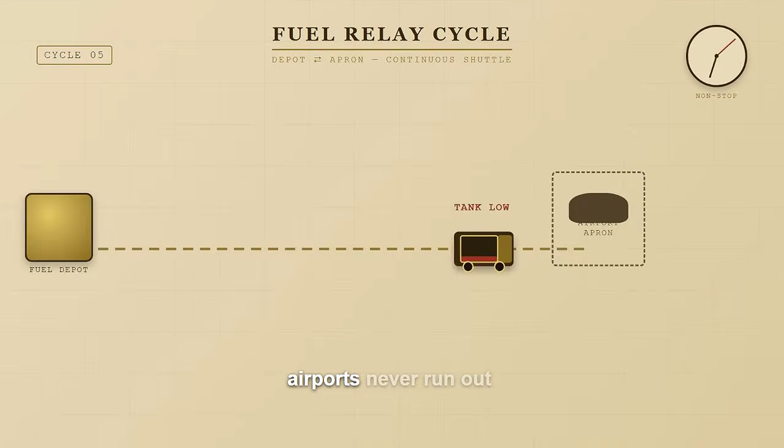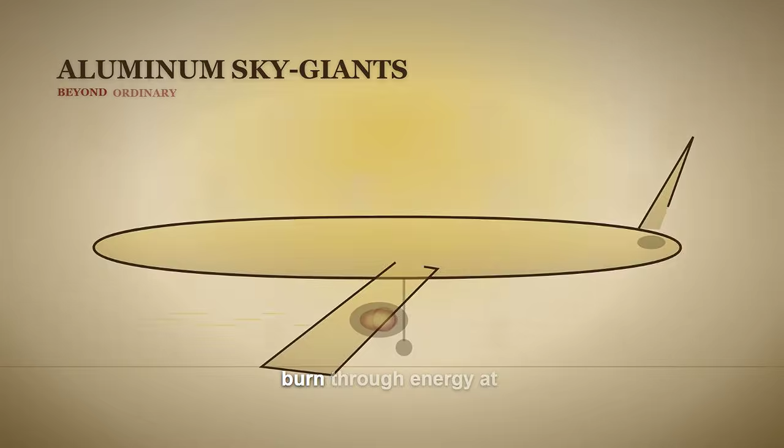To understand the sheer gravity of this problem, you have to realize that an airport is nothing like a local gas station. When you pull your car up to a pump, you are buying maybe 12 to 15 gallons of gasoline, which will easily last you a week or two. A major airport, however, isn't fueling commuter cars. It is supplying massive aluminum sky giants that burn through energy at a rate that defies ordinary human intuition. A single commercial aircraft can consume more fuel during its initial takeoff roll than a typical driver uses in an entire year of daily commuting.

When you multiply that individual consumption by the hundreds or even thousands of daily flights that pass through a global megahub, the numbers quickly spiral into a realm that feels entirely impossible to manage. Yet, the fuel never stops flowing. The planes never pull up to a gate only to be told that the pumps have run dry. Passengers sit comfortably in the terminal, sipping coffees and checking boarding passes, completely oblivious to the massive, invisible infrastructure operating directly beneath their feet to ensure the global transportation network never grinds to a halt.

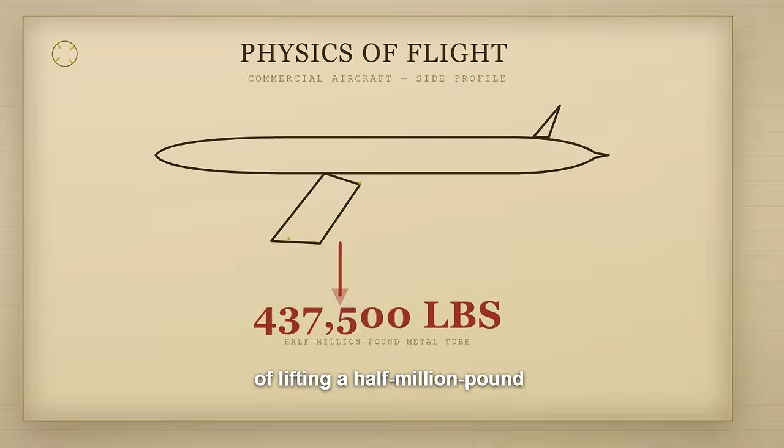To fully grasp the scale of the aviation industry's thirst, we have to look directly at the math behind modern jet engines. For decades, aerospace engineering has focused heavily on making commercial aircraft as fuel-efficient as possible. But the physics of lifting a half-million-pound metal tube into the upper atmosphere require a monumental amount of raw power. Consider the varying appetites of commercial aircraft. A standard short-haul workhorse like the Boeing 737-800 carries a maximum fuel capacity of just under 7,000 gallons, burning through roughly 850 gallons every single hour it is in the air.

Step up to a mid-sized, long-haul wide-body like the Boeing 787-9 and the capacity surges to over 33,000 gallons, with an average hourly burn rate of 1,600 gallons. The larger Boeing 777-300ER pushes those boundaries even further, holding nearly 48,000 gallons of jet fuel and guzzling an incredible 2,500 gallons per hour. When you reach the absolute peak of commercial aviation architecture, the double-decker Airbus A380, the numbers become entirely surreal. The A380 can hold up to 84,500 gallons of jet fuel within its massive wings and fuselage tanks. That is enough liquid to fill a large backyard swimming pool multiple times over, loaded into a single airplane for a single journey.

When you scale this up to the level of a primary international hub, the daily demand becomes astronomical. Airports like Hartsfield-Jackson Atlanta International, London Heathrow, or Dubai International require between 3 million and 5 million gallons of jet fuel every single day just to keep their scheduled flights moving. If you were to rely entirely on traditional tanker trucks to deliver that volume of fuel from external refineries, you would need a continuous convoy of hundreds of trucks arriving at the airport gate every single hour of the day. It would create a logistical bottleneck of catastrophic proportions, paralyzing local highway systems and overwhelming airport security checkpoints. Because running out of fuel is never an option. If a major hub experiences even a brief interruption in its fuel supply, the global aviation network begins to unravel almost immediately.

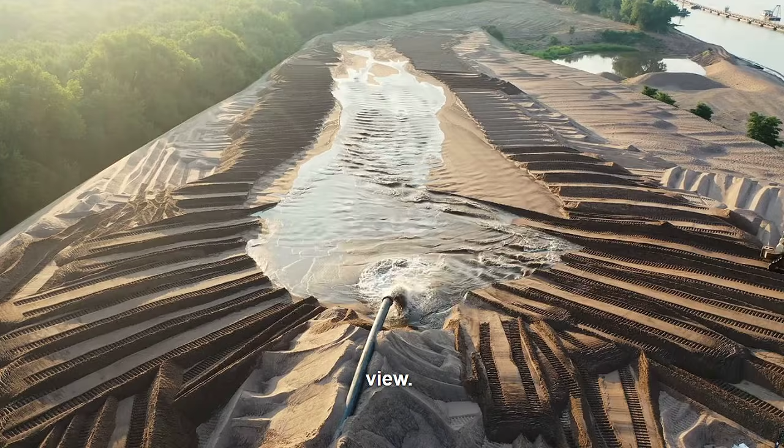This unbreakable supply chain begins far away from the active runways, rooted in a vast, secret network of underground pipelines. Most people assume that jet fuel is manufactured nearby or delivered purely via surface transport, but in reality, major airports are directly connected to the regional and national pipeline infrastructure of their respective countries. These pipelines stretch across hundreds of miles, silently moving millions of gallons of refined petroleum products from distant coastal refineries directly toward the perimeter of the airfield.

It is a system that functions remarkably similarly to a municipal water network. The fuel is constantly under pressure, always moving and always flowing toward the airport's primary intake valves, completely independent of traffic congestion, weather anomalies, or surface disruptions. The engineering behind these pipeline systems is a marvel of modern fluid dynamics.

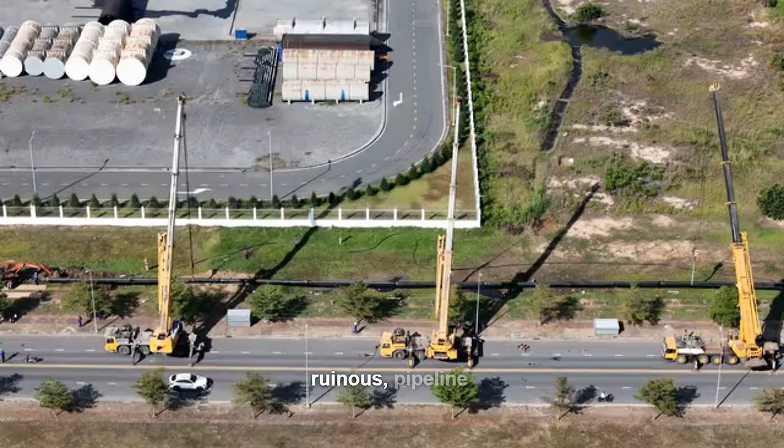Because building separate pipelines for every single type of petroleum product would be financially ruinous, pipeline operators use a technique known as batching. A single underground pipeline might transport automotive gasoline for 12 hours, followed immediately by ultra-low sulfur diesel, and then followed by a massive batch of Jet A or Jet A1 fuel. These distinct liquids travel through the same pipe back-to-back, moving at precise speeds to minimize mixing at the interfaces.

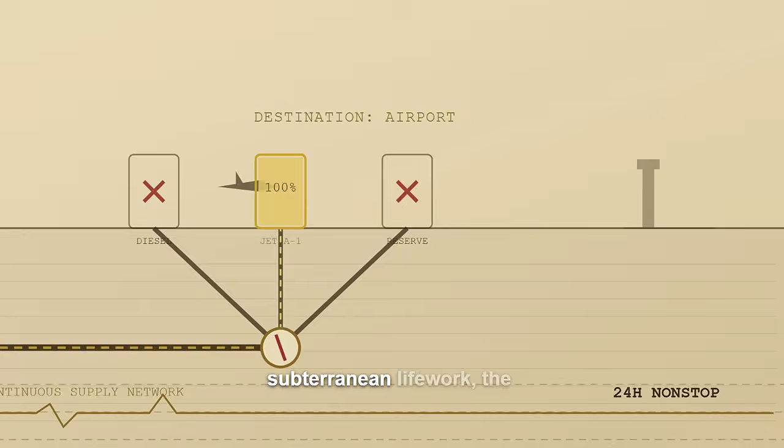High-tech monitoring stations use density sensors and laser spectrometry to detect exactly where one product ends and another begins, allowing operators to divert the incoming jet fuel into the correct storage facilities once it finally reaches its destination. Without this continuous subterranean lifeline, the modern aviation industry quite simply could not exist.

Once the pipeline delivers the fuel to the airport property, the liquid transitions into the first major line of defense against supply disruption, the fuel farm. Located usually on the far periphery of the airport boundary, well away from the passenger terminals, the fuel farm is a heavily fortified industrial compound dominated by clusters of colossal, white storage tanks.

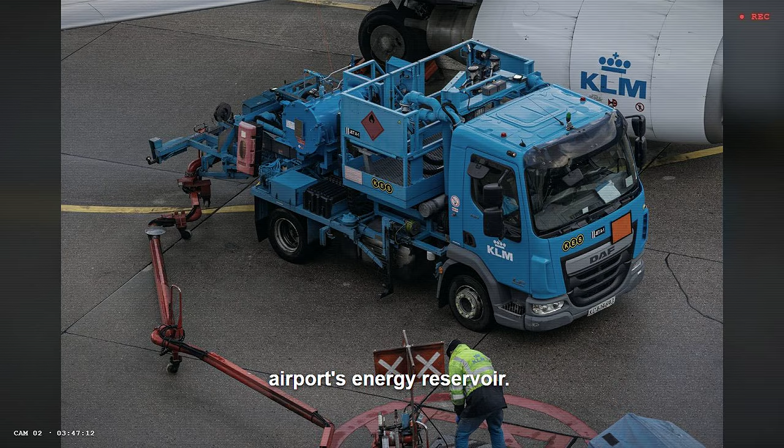These structures are easily recognizable from the air, but few passengers appreciate the critical role they play as the airport's energy reservoir. A standard airport fuel farm consists of multiple tanks, each capable of holding several million gallons of fuel. Combined, they are designed to maintain a strategic buffer, typically a 3 to 5 day supply of fuel, to insulate the airport against unexpected disruptions upstream, such as a temporary refinery shutdown or a pipeline maintenance event.

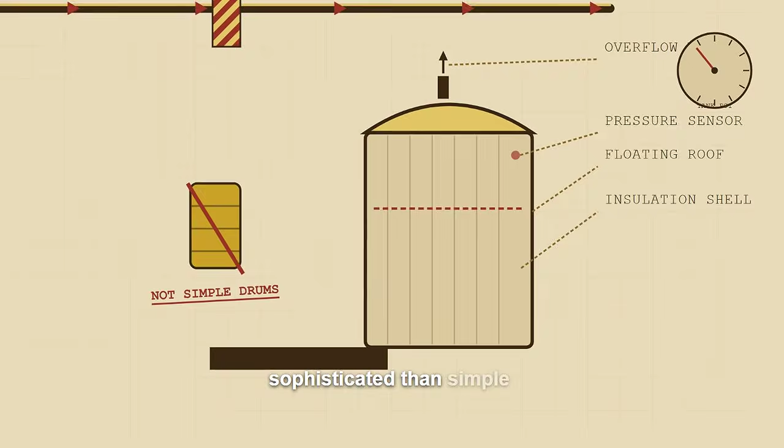These massive storage units are far more sophisticated than simple metal drums. Most modern aviation fuel tanks utilize a design known as a floating roof. Instead of having a fixed ceiling with an empty pocket of air above the liquid, the roof literally floats directly on top of the fuel surface, rising and falling as the tank is filled or drained.

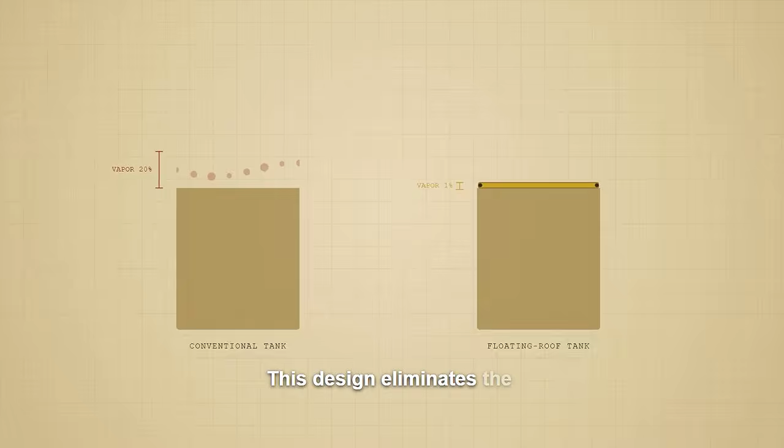This design eliminates the presence of vapor space inside the tank, drastically reducing the risk of explosive vapor buildup and preventing evaporation loss. Furthermore, the interior surfaces are coated with specialized epoxy liners to prevent metallic corrosion, ensuring that the fuel remains pristine during its period of rest.

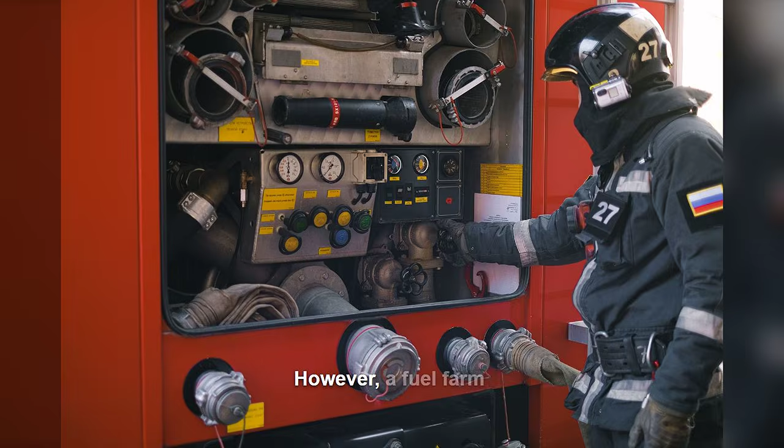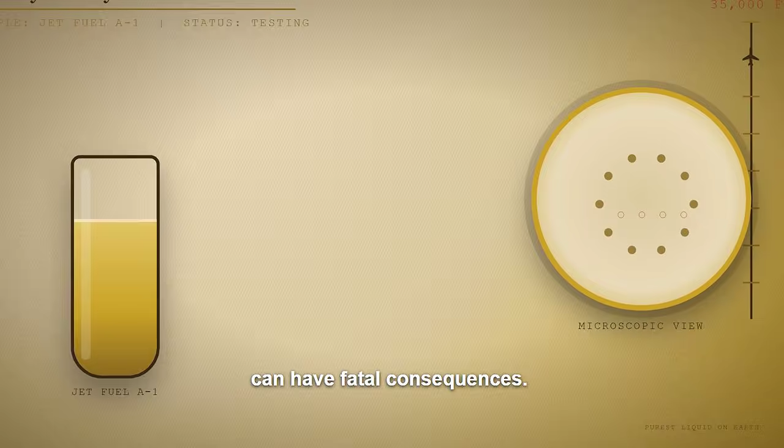However, a fuel farm is not merely a passive storage facility. It is a highly active quality control laboratory. Jet fuel is subjected to some of the strictest purity standards of any liquid on Earth because at 35,000 feet, small impurities can have fatal consequences. The primary enemy of jet fuel is water.

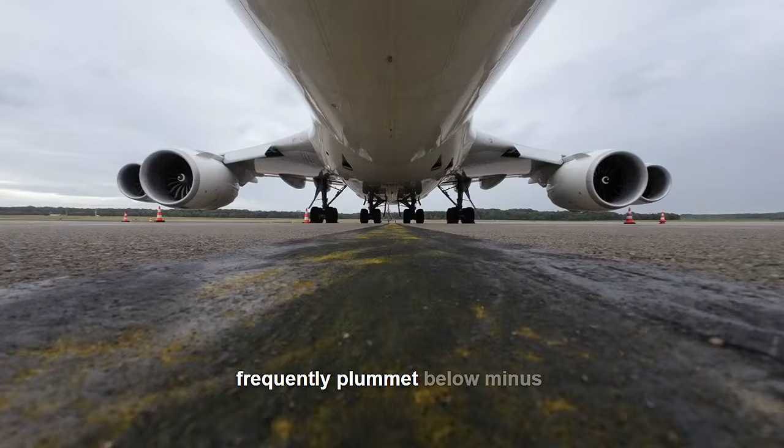If water manages to find its way into an aircraft's fuel tanks, it settles to the bottom because it is denser than the fuel. When the aircraft climbs into the extreme cold of the upper atmosphere, where ambient temperatures frequently plummet below -50 degrees Celsius, that suspended water can instantly freeze into ice crystals. These ice crystals can clog delicate fuel filters, starving the engines of fuel and causing a catastrophic dual-engine flameout.

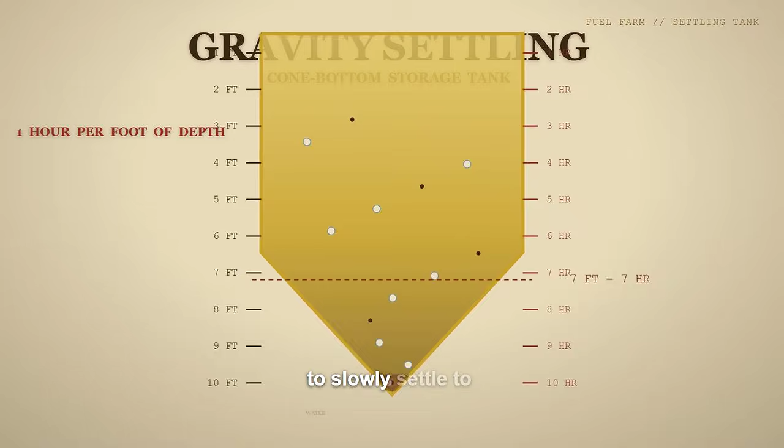To prevent this, the fuel farm enforces a strict operational protocol known as settling time. Whenever a tank receives a new batch of fuel from the pipeline, it is immediately locked down and isolated. The fuel must sit entirely undisturbed for a specific period, typically 1 hour for every foot of liquid depth in the tank. This allows any microscopic water droplets or fine particulate matter to slowly settle to the absolute bottom of the cone-shaped tank floor, where it can be mechanically drained off through specialized sump valves.

Only after passing a battery of rigorous chemical tests, including the clear and bright visual inspection and chemical water detection kits, is the fuel finally cleared to move forward into the distribution system.

Once the fuel is certified pure, it must be transported from the perimeter fuel farm to the actual wings of the aircraft parked at the gates. At smaller regional airports, this task is still handled by traditional fuel bowsers, specialized tanker trucks that drive back and forth across the tarmac. But at a massive mega hub, relying on trucks to move millions of gallons of fuel across active taxiways would be a logistical disaster and an unacceptable safety hazard.

Instead, these airports utilize a brilliant piece of infrastructure known as an underground hydrant system. Beneath the thick concrete slabs of the airport apron lies a vast, high-pressure network of steel piping that connects the central fuel farm directly to every single parking gate at the terminal. This system is kept constantly pressurized by massive, computer-controlled pumps at the fuel farm, which adjust their output dynamically based on how many aircraft are drawing fuel simultaneously across the airport complex.

The operational flow of this underground network is a masterpiece of hidden engineering. It begins at the central fuel farm, where high-pressure pumps force the certified jet fuel into the primary subterranean mains. These pipelines branch out beneath the terminal apron substructure, terminating directly at individual gate positions. When an airplane pulls up to the gate, a passenger looking out the window might notice a small, inconspicuous metal hatch embedded directly into the concrete beneath the aircraft's wing. This hatch houses a high-pressure hydrant pit valve.

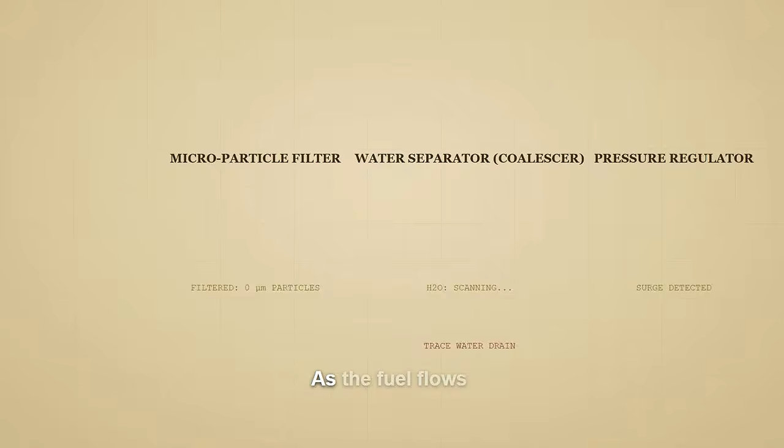To fill the airplane, a ground crew member drives up in a compact vehicle known as a hydrant servicer or a pumper truck. Crucially, this vehicle does not actually carry any fuel in its own chassis. Instead, it acts as a mobile bridge, a sophisticated regulation and filtration platform. The operator connects a heavy-duty intake hose from the underground concrete pit valve directly into the hydrant servicer vehicle. As the fuel flows into the vehicle, it passes through specialized internal systems that filter out microparticles and any trace water while regulating the surging fluid pressure to safe levels.

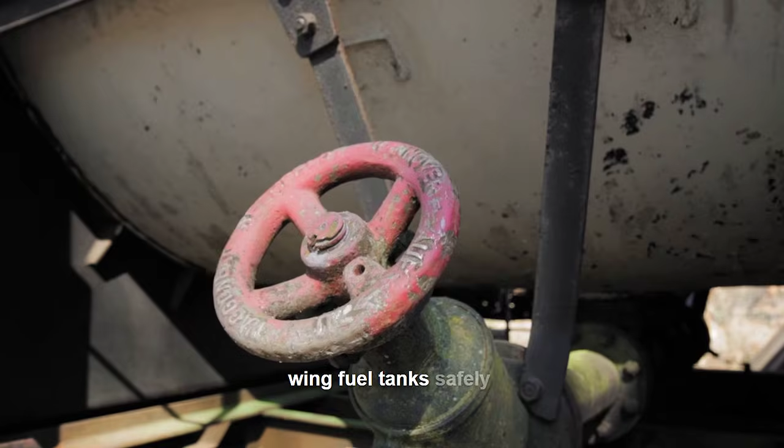From the vehicle, the fuel is pumped up through high-delivery deck hoses into the aircraft's wing manifold, filling the internal wing fuel tanks safely and efficiently. As the valves open, fuel rushes out of the ground and surges up into the aircraft's wings at rates of up to 1,000 gallons per minute. The system is designed with incredible safety redundancies, including an emergency deadman switch that the fuel operator must actively hold in their hand. If the operator collapses, releases the switch, or steps away for even a second, the entire high-pressure flow instantly cuts off, preventing an environmental spill or a fire hazard.

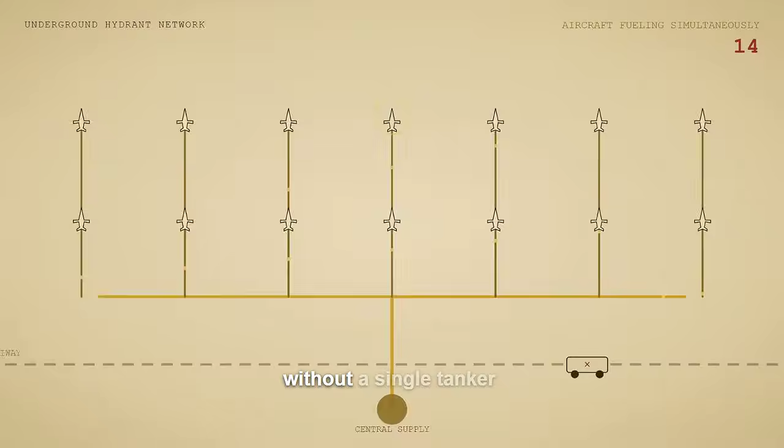This underground network effectively transforms the entire airport apron into a massive, invisible gas station, capable of delivering millions of gallons of energy directly to dozens of aircraft simultaneously without a single tanker truck ever needing to cross a taxiway. Despite the incredible sophistication of these pipeline networks, fuel farms, and hydrant systems, the entire operation remains vulnerable to the chaotic realities of our world. While complete fuel exhaustion is exceedingly rare, localized supply crises have occurred, offering a stark look into just how dependent global aviation is on this invisible infrastructure.

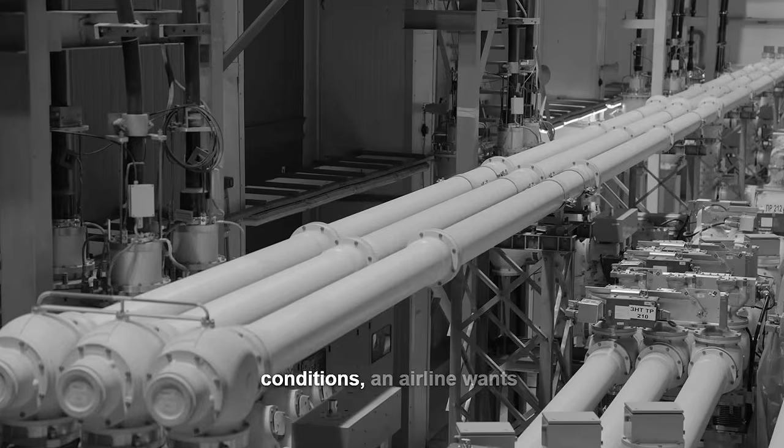In recent history, major hubs have faced severe fuel rationing due to unexpected pipeline ruptures, prolonged refinery strikes, or sophisticated cyber attacks on energy infrastructure. When a crisis strikes, the airport's strategic buffer tanks buy the airlines time. But if the disruption lasts more than a few days, the aviation industry must quickly pivot into an aggressive, survivalist mode of operation. The primary strategy used by airlines during a localized fuel shortage is an economic and logistical practice known as tankering. Under normal operating conditions, an airline wants its aircraft to land at a destination with as little fuel as possible because carrying the extra weight of unnecessary fuel burns more fuel, increasing operational costs and carbon emissions.

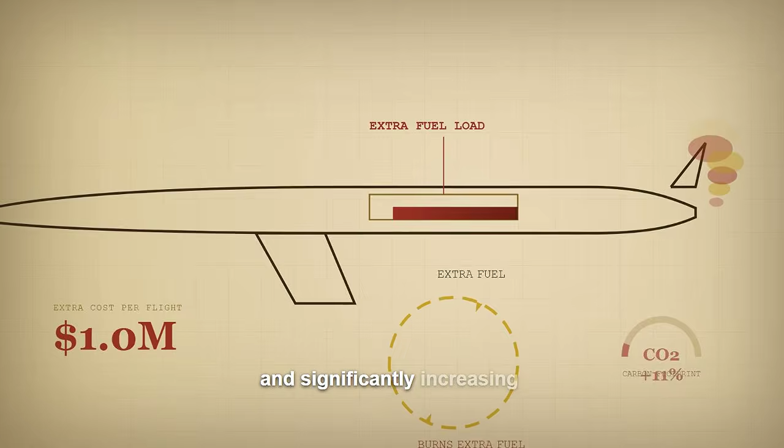However, if an airline knows that their destination airport is suffering from a critical fuel shortage, they will intentionally fill the aircraft's tanks to absolute capacity at their origin airport. This allows the plane to fly to the fuel-starved destination, land, drop off its passengers, and take off again for the return journey without taking a single drop of fuel from the impacted airport. While tankering is highly effective at keeping flights moving during an emergency, it comes with a severe financial and environmental penalty. Carrying that immense weight penalty across thousands of miles means the airline is burning a substantial amount of extra fuel just to transport fuel, costing millions of dollars and significantly increasing the flight's carbon footprint.

If the shortage is severe enough that tankering cannot bridge the gap, airlines are forced to add unscheduled technical stops to their long-haul routes. A non-stop flight from Asia to Europe might be forced to land at a midway point in Central Asia or the Middle East simply to refuel, shattering flight schedules, disrupting crew duty hours, and causing a massive ripple effect of delays that can take weeks to fully resolve.

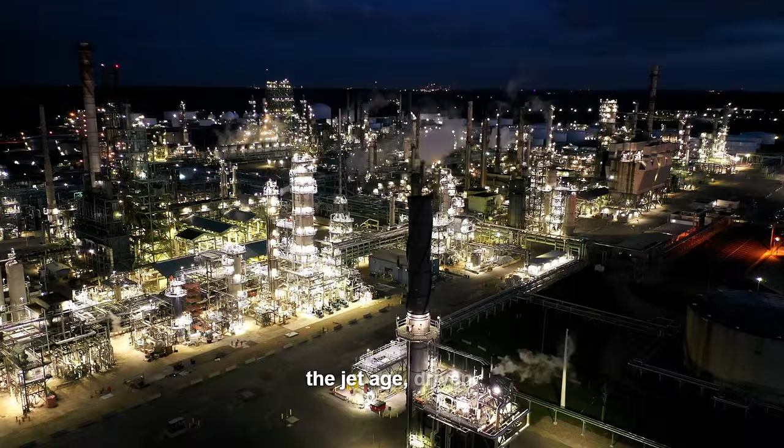These rare emergencies serve as a vivid reminder that the apparent simplicity of booking a flight and flying across the globe is entirely dependent on the continuous, unbroken health of a deeply complex energy supply chain. As we look toward the future, the logistics of airport fuel management are facing their most profound transformation since the dawn of the jet age, driven by the global push for environmental sustainability.

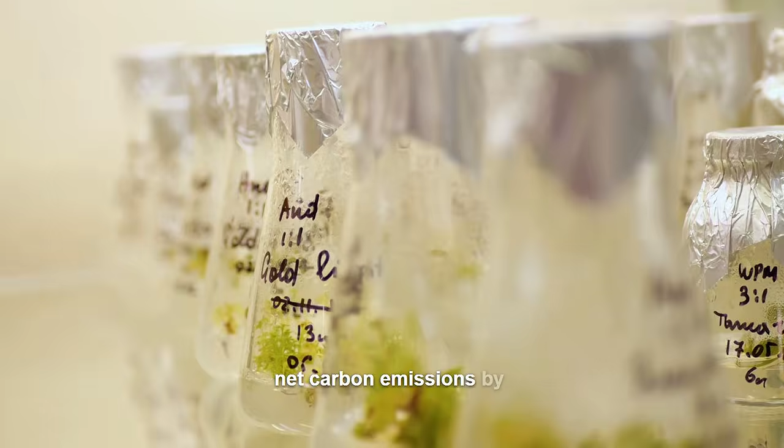The aviation sector is under intense pressure to decarbonize, and the primary weapon in this battle is sustainable aviation fuel, commonly known as SAF. SAF is a biofuel manufactured from renewable resources such as used cooking oils, agricultural waste, and municipal solid waste, and it has the potential to reduce net carbon emissions by up to 80% over its life cycle compared to conventional petroleum-based jet fuel.

The journey of sustainable aviation fuel from raw material to an airplane's wings requires a highly specialized upstream integration flow before it ever reaches the terminal gate. The process begins with the collection of renewable feedstocks, such as agricultural waste or used cooking oil. These raw materials are transported to a dedicated SAF production plant, where they are refined through advanced chemical processes into pure biosynthetic kerosene. Because production facilities are currently decentralized, this pure biofuel must be transported via high-volume rail cars, barges, or specialized delivery trucks directly to the airport fuel farm interface.

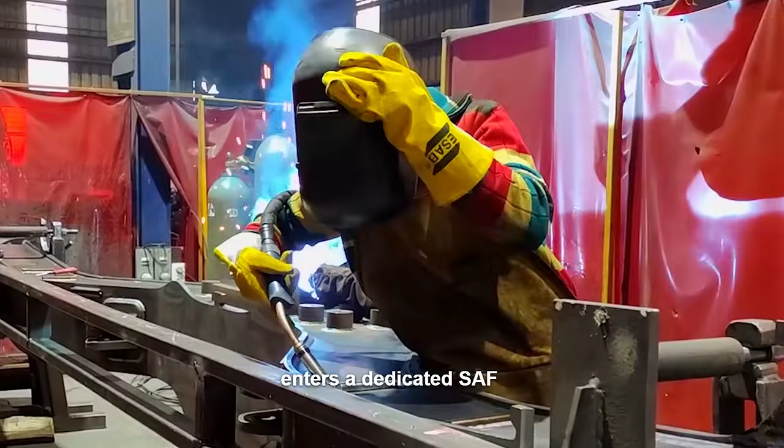Once it arrives on airport property, the fuel enters a dedicated SAF receipt and testing facility to ensure its chemical properties are flawless. From there, it moves into automated blending infrastructure, where it is systematically mixed with conventional Jet A fuel arriving from the primary regional pipeline. The system carefully combines the two fluids to create a certified 50-50 drop-in molecular blend, which is then safely released into the primary high-pressure airport hydrant network for standard gate delivery.

This blending process cannot happen haphazardly at the gate. It must be carefully executed at upstream blending facilities or within the central fuel farm itself to ensure that the final chemical composition matches the exact rigid specifications required by aircraft engines and certified by international safety bodies.

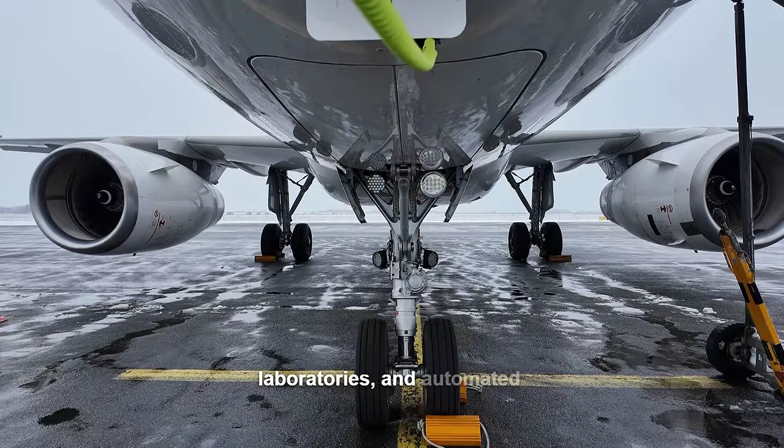This requires modern fuel farms to expand their infrastructure, adding dedicated offloading stations, specialized testing laboratories, and automated blending systems, all while maintaining the continuous, high-volume flow of conventional fuel that the airport relies on to survive day to day. It is an operational puzzle, akin to modifying an engine while the car is speeding down the highway at 70 miles per hour.

When you step back and look at the entire picture, you realize that a modern airport is far more than a simple transportation terminal where people board airplanes. It is a massive industrial-scale energy hub, a processing facility, and a highly complex logistical node operating on a scale that defies easy visualization. The sheer volume of fuel consumed every single day by global aviation is a testament to the incredible interconnectedness of our modern world, and the fact that this system operates so flawlessly that the average passenger never even thinks about it is perhaps its greatest achievement.

The next time you find yourself sitting in an airport terminal waiting for your flight to board, take a close look out the window at the concrete tarmac below. Look past the baggage carts, the catering trucks, and the boarding bridges. Consider the invisible world operating quietly right beneath the wheels of those massive airplanes. Think of the pipelines stretching across distant fields and mountain ranges, the colossal fuel farms working around the clock to certify chemical purity, and the high-pressure hydrant networks pulsing with energy directly beneath your feet.

The reason airports never run out of fuel isn't because they simply have a lot of it stored away in a back room. It is because they are the terminal point of an incredible, living, breathing subterranean system that operates every single second of every single day. A masterclass in modern engineering and supply chain management that quietly works to ensure the world never stops moving.